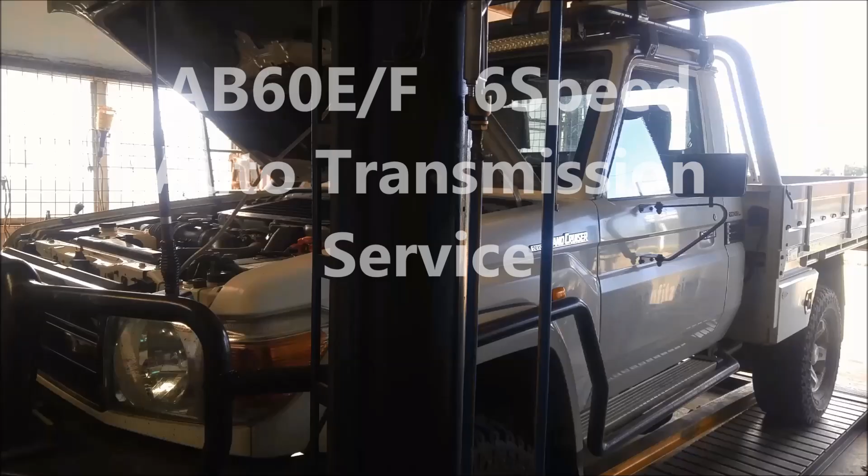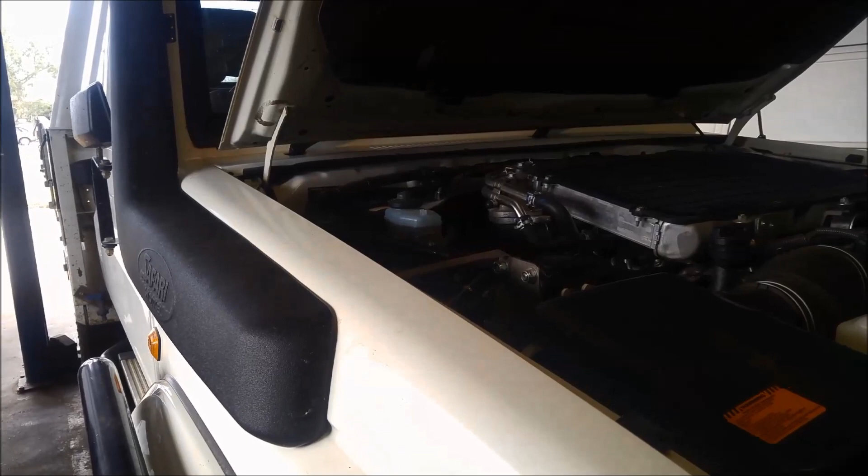G'day. Today we're doing a service on a Toyota Landcruiser 200 series, and it's got the AB60E six-speed auto transmission in it. It's in the same family as the A750, 760 transmissions, so it's similar but different. This one's the turbo diesel or V8 version.

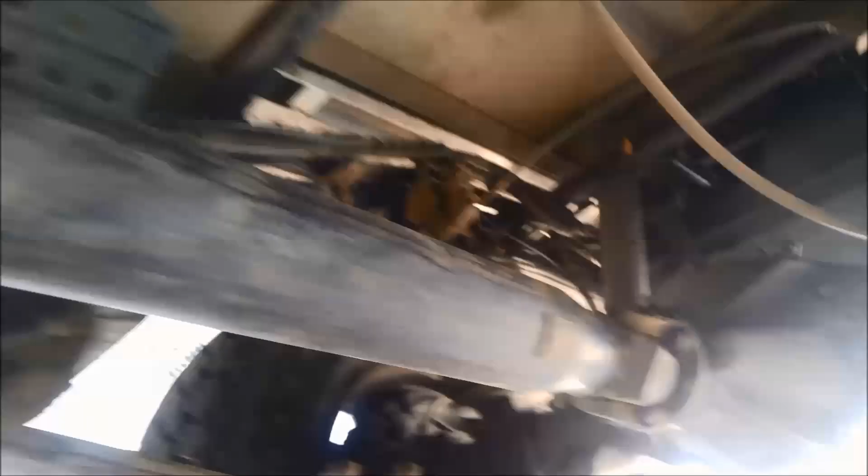So we're just going to drop the oil out of it and drop the pan. So while we've got it up, we're just going to test, or have a look if the unis are worn, front and rear. Check the oil level in the transfer case and just inspect for any leaks anywhere. It looks pretty good. You also got this front tail shaft for the four-wheel drive, front and rear unis.

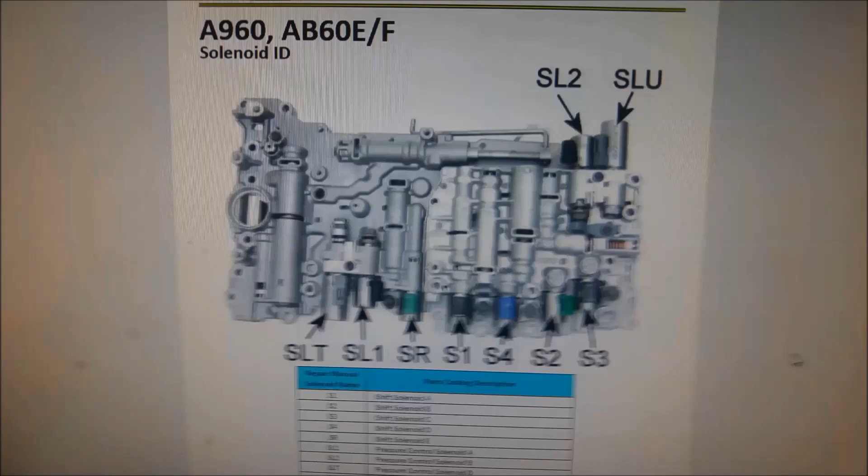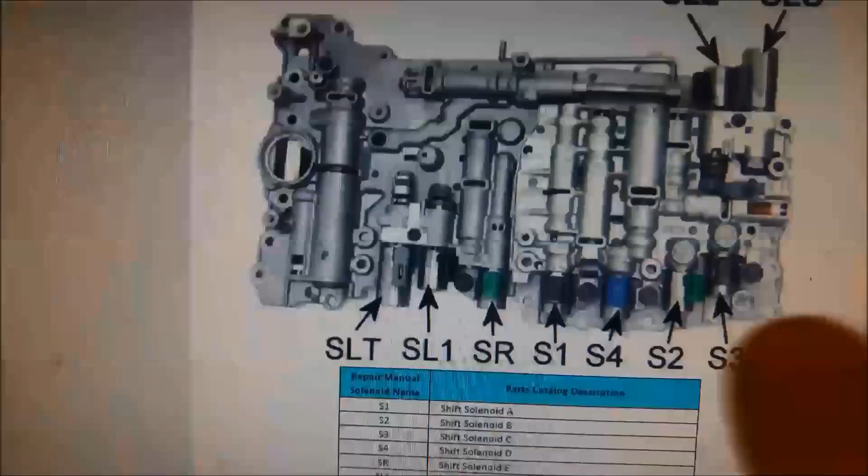And we're lucky with these ones, you can actually get the pan off without removing the cross member, so there's plenty of access there. Now to drain the oil, you remove this lower plug here and that'll just drain the oil out. To fill it, there's a little plug on the side here, so you're filling it in there, and there's a little sleeve in here, and that's where it measures the height of the fluid level. We'll show you that later in the video.

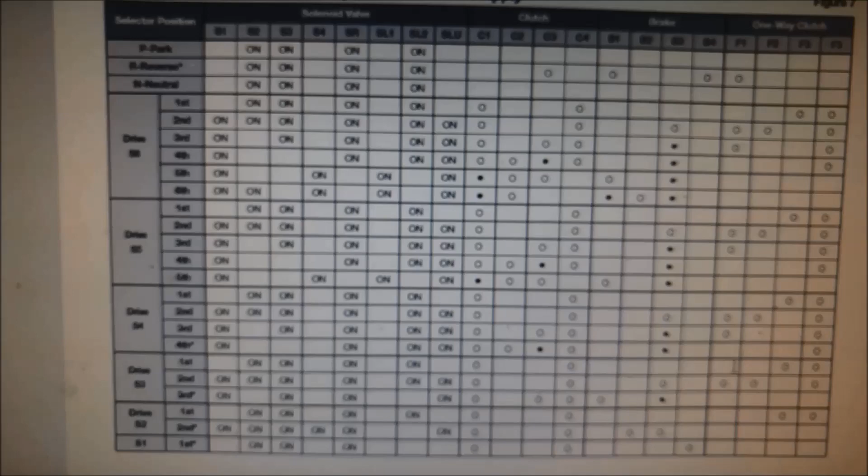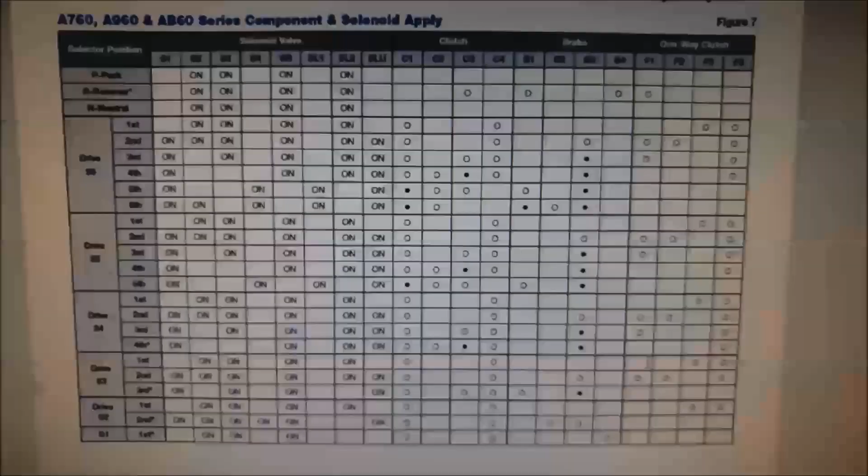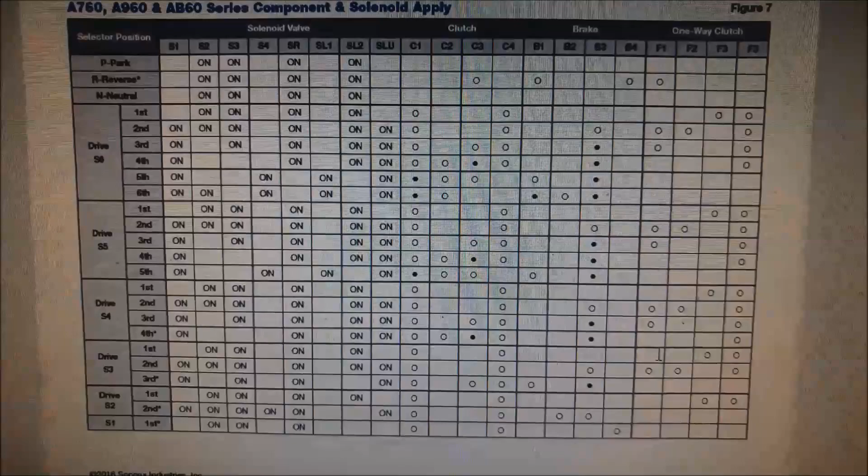Okay, just for reference sake, here's a diagram of the valve body and the solenoid identification. You can see here what they are, and just to note, the SL1 and the SL2, this one here and up here, they're actually the same solenoid, so they're interchangeable. And also the S1, which is this one here, and the S3. So the SL1 and the SL2 and the S1 and the S3, they're interchangeable. All the other ones are different.

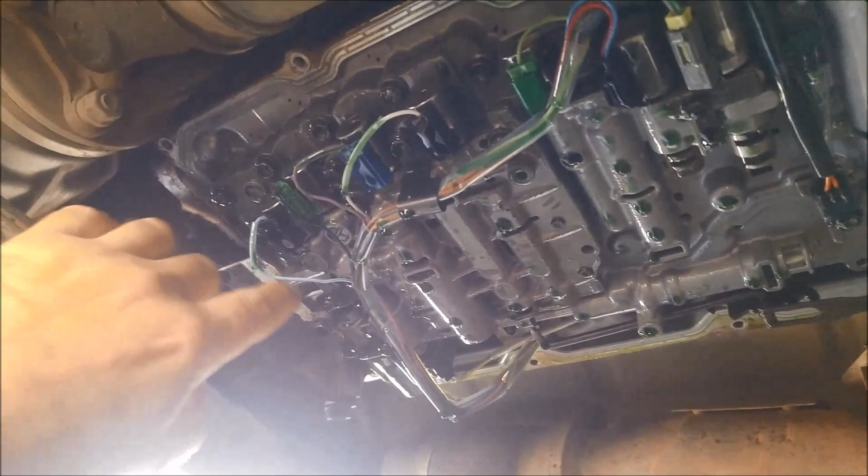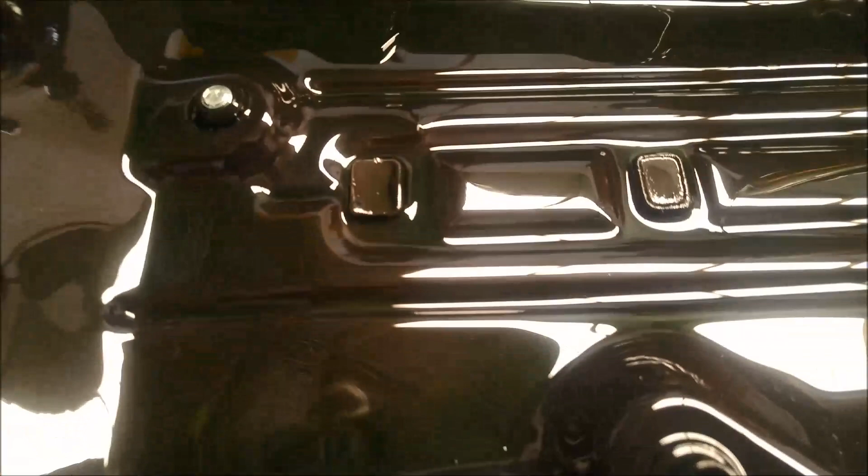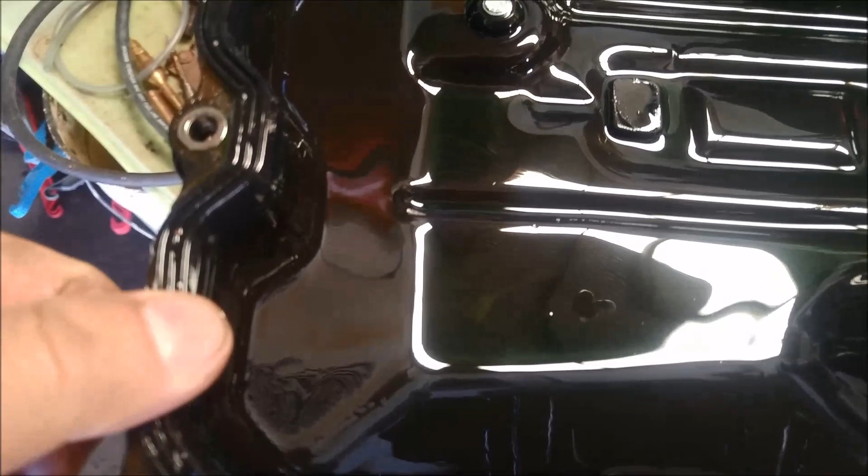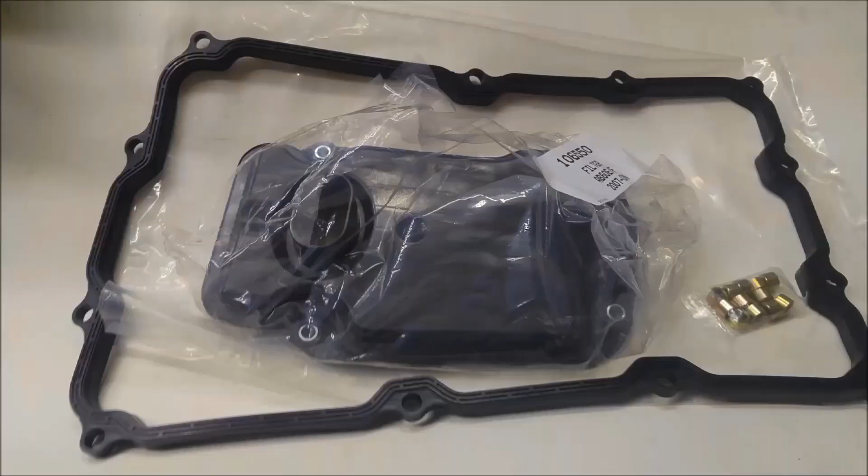But this information's free on the Sonnax website, and you can look up this sort of information. It's a great reference point, and they also have a great variety of improvement kits, or if your valve body's worn out, you have ream kits and put oversized valves, etc. in there.

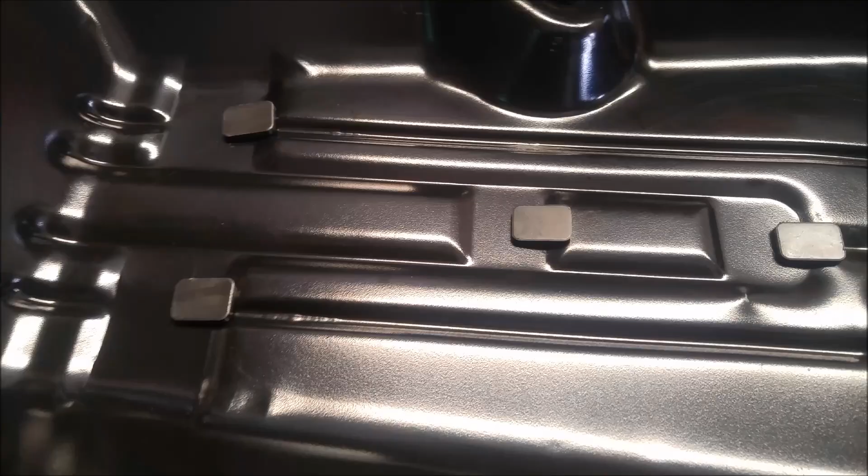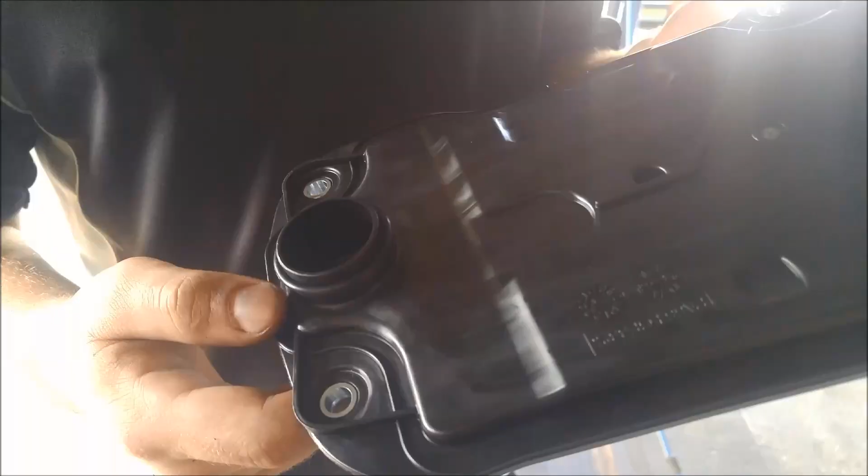Okay, we've got the filter out. It's just 4 little 10mm bolts, and we're just going to make sure that all these connectors are in securely. It's a good idea to just give them a little bit of a wriggle. That there's just the coil floating around in the canister, so you don't have to worry about that if it's loose, if it moves like that. And also it's a good idea to just double check that these aren't going to rub through on the pan. They usually have this plastic cover there just to protect the wiring anyway,

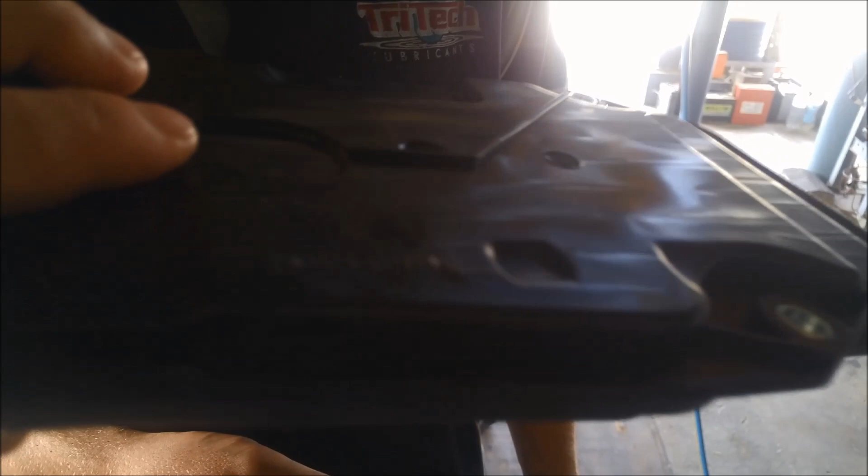but that's basically it. Whoever did the service previously, they put a green full synthetic fluid in there, so when we put our TriTech or Penrite stuff in, which is red, it's going to make it a nice purple.

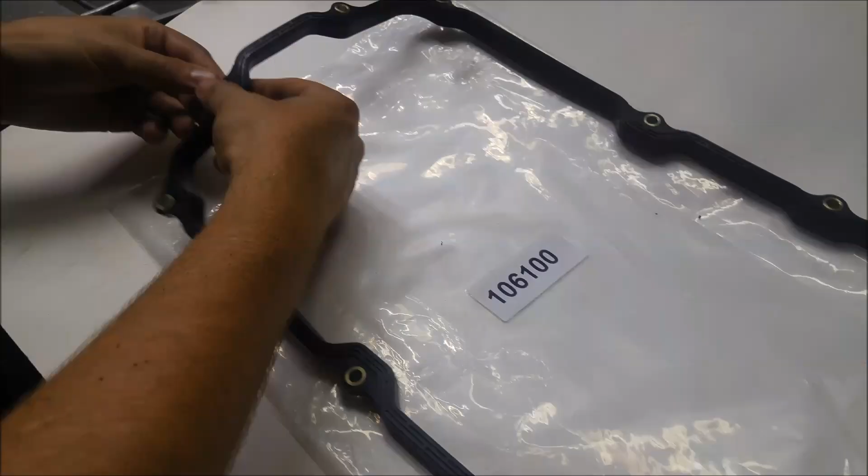You can see the pan, a little bit of fuzz on the magnets there, the 4 magnets, but it doesn't look too bad. And these also have a rubber pan gasket, and they've also got these little spacers there, so you've got to make sure you put those in, or when you do it up, it'll tighten that rubber too much. These sort of stop it from being crushed too much. So we're going to clean up the magnets, clean the pan, replace the filter and pan gasket, and Bob's your uncle. There's not much else you can do on this transmission unless you've got a problem with it.

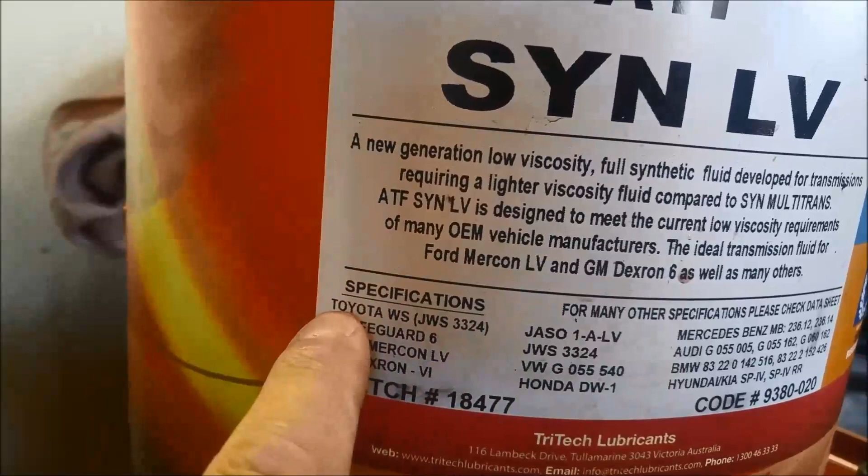Okay, here we've got the pan seal, and in the kit you'll get these little spacers as well, so don't forget to put them in. If you try and put it in without the spacers, you'll end up squashing that pan seal.

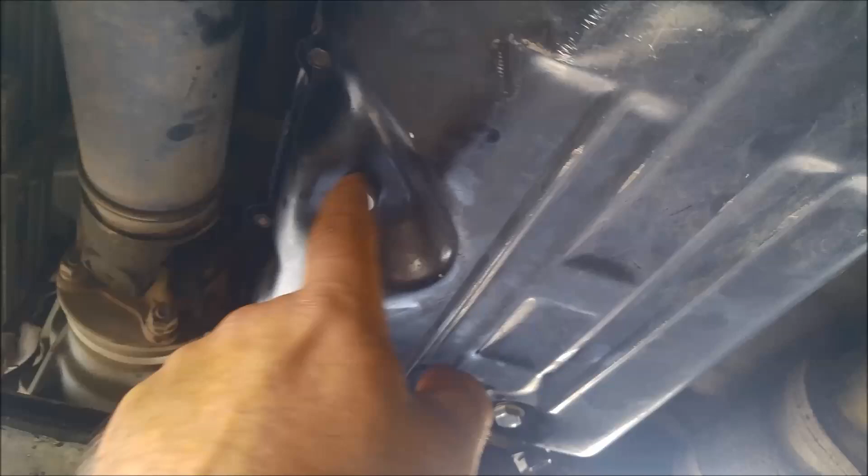The filter is a little bit different. This one has this little bit here, and as per usual with the magnets, we always like to leave them up on the ridge just so you've got more surface area working with the magnets like that. And that's a little tube that measures the height there for the fluid level.

And also make sure you've got this O-ring there as well. Sometimes they're missing out of the kit, but make sure that's there. If that doesn't seal properly, you're going to be sucking air. And you can see where the pickup is fairly low on that filter. There we go, we've got all those in. Just double check it.

And today we're using the ATF full synthetic LV, low viscosity, and that one is equivalent to the Toyota WS type fluid, which is what's recommended for this vehicle.

So we're going to leave the plug in there for the moment, and we're actually going to put probably about 4 litres of fluid in, and then we can start the vehicle up and keep it running, and then take this plug out and we'll just keep filling it until fluid is coming out of here.

Without the motor running, I've just put 4 litres in, and now we're going to just start it up, and then we can take that plug out and just make sure we've got enough in there. Yeah, rightio. Go a little bit over full, so I can put the plug back in there now.

It's also important to not get it over about 50 degrees because the oil will expand. So it's a pretty warm day today. I think it's about 38-40 degrees, so it won't take long for that to warm up to 50 degrees. So the oil's just started trickling out.

And now I'm going to put the plug in, go for a bit of a drive, and then we'll just check it again, but making sure that it's not over 50 degrees. If it is over 50 degrees, you've just got to sit and let it cool down and then check it again. You can see it's on about 45 degrees and it was just trickling out. So when that gets up to 50 degrees, it'll expand, so even more fluid will come out.

So on a hot day like today, it'll warm up very quickly, so you've got to do it as quickly as possible. And like I mentioned, if it goes over 50, just let it cool down and then test it again with the motor running. Anyway, hope that helps. Not a difficult service to do.